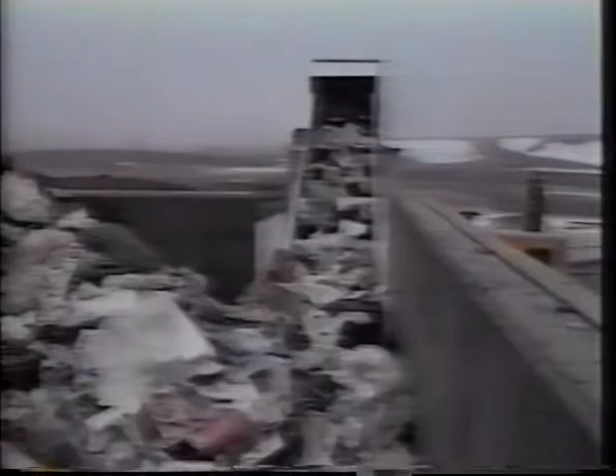What is the solution? Utilizing proven methods of waste processing to prepare the solid waste for use as a fuel for the Thermogenics gasification system. This provides substantial benefits to the waste generator, whether it's an agricultural operation using local biomass or an industry, and to local and regional government.

The benefits are: volumes that must be transported and then landfilled may be reduced by as much as 80 or 90%. Costs of transporting and landfilling wastes are reduced. Open burning and operation of unsanitary dumps is stopped. Jobs are created to process the waste, and valuable byproducts such as electrical power and liquid transportation fuels like diesel or ethanol can be produced.

A typical facility layout for municipal waste includes receiving the waste and a preliminary separation to remove the bulky and non-combustible elements. The remaining waste is then sorted on a conveyor. This removes any materials that have value for recycling, as well as any remaining non-combustible materials.

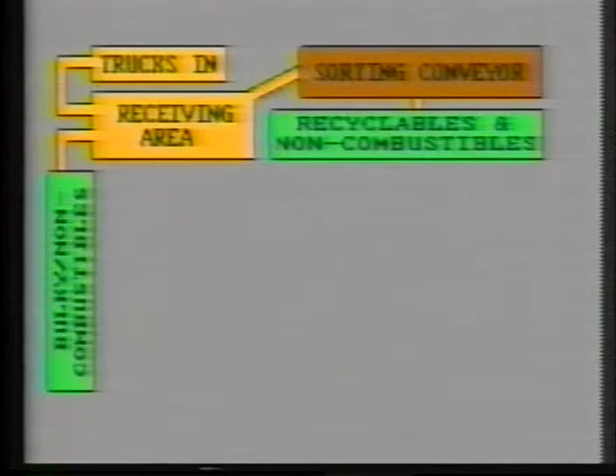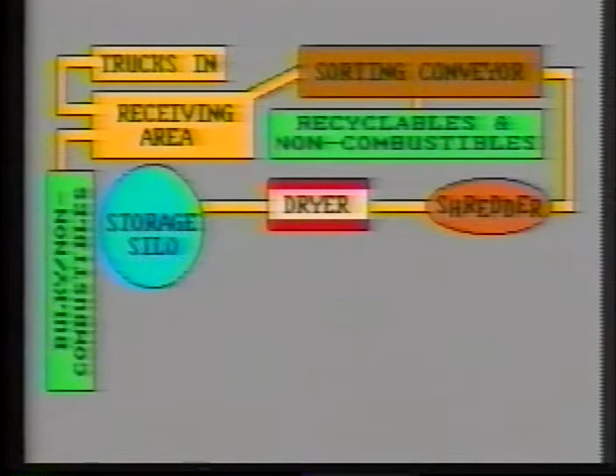The remaining organic waste is shredded and then dried. The drying process utilizes waste heat from the engines. The organic material is then stored for use as the fuel for the gasifiers. The byproducts, electrical power, liquid fuels, or heat, are used on-site or sold to outside users.

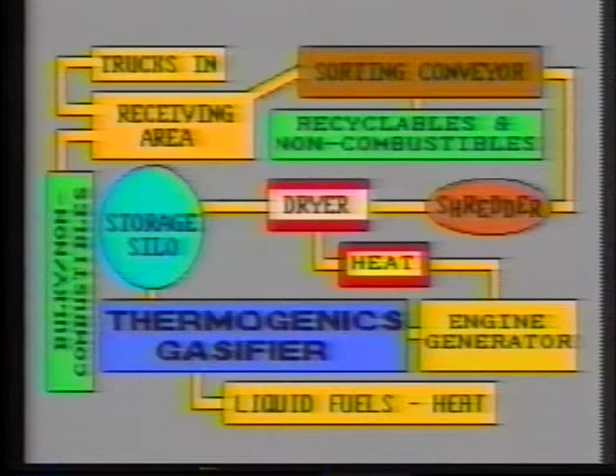If agricultural waste such as bagasse, rice husks, wood, or plant stalks are utilized, then it may only be necessary to shred and dry the waste before using it for fuel.

The organic materials, which are often as much as 80% of the incoming waste, may include materials such as food waste, biomass, paper and cardboard, plastics, shredded tires, and dewatered sludge. When shredded, and if necessary dried with waste heat from the engines, this becomes refuse-derived fuel, which is suitable for use in a Thermogenics gasification system.

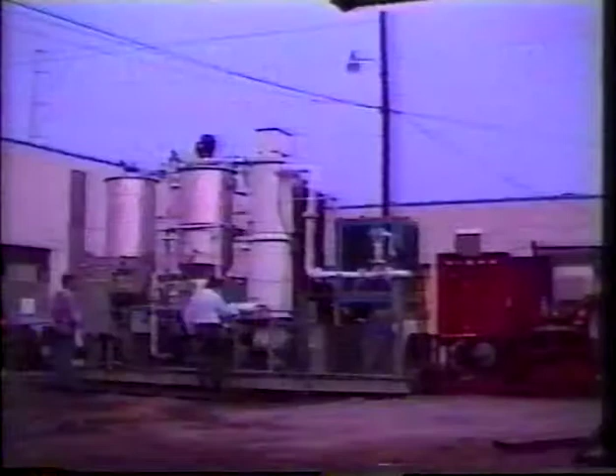This is the Model 103 Thermogenics gasifier with a capacity of 1,000 pounds, or 455 kilograms per hour, of refuse-derived fuel, or RDF, or other organic materials such as biomass, wood waste, shredded tires, or dewatered sewage sludge.

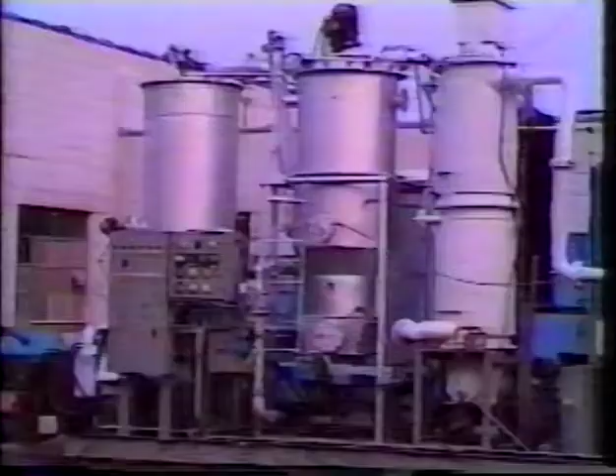This volume of RDF waste produces approximately 500 kilowatt hours of electrical power, more than enough for the entire facility. Other wastes with higher heating values can produce over 2,000 kilowatt hours of electrical power per ton of feedstock or large quantities of clean combustible gas or high volumes of liquid fuels. The gasifier does this without any emissions to the atmosphere and without the requirement of an operator.

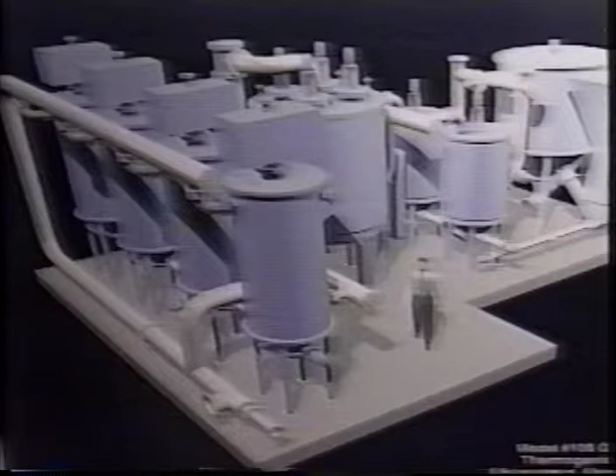More commonly, a larger system like the Model 106 shown here is utilized. Each unit is rated at 72 tons, or 65 metric tons, per day and can produce about 2,500 kilowatt hours of electrical power, or as much as 7 to 10,000 gallons per day of liquid transportation fuels from an RDF feedstock. Several gasifiers can be combined for a larger facility.

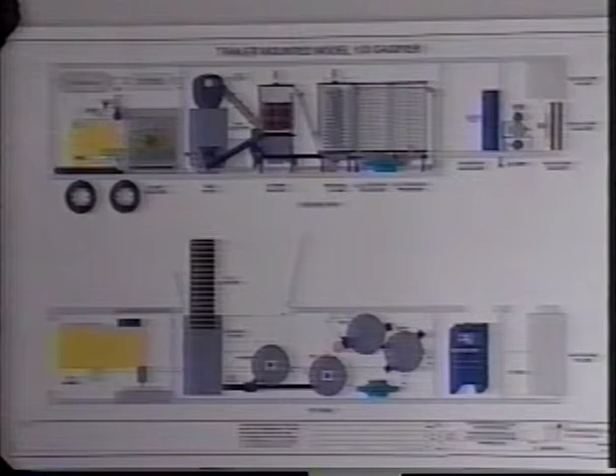Other gasifier configurations include trailer-mounted units in the 1/2 to 1 ton per hour capacity range, like the unit shown here. Other systems might provide a direct feed of gas to a boiler and thus require much less processing, and will have a cost of about half that of the full gasification system.

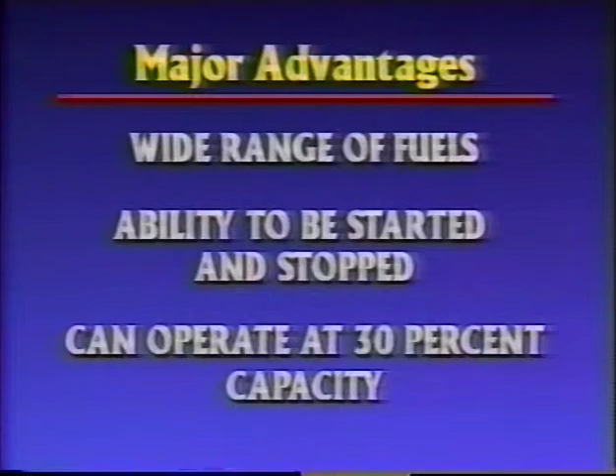A major advantage of the Thermogenics gasification system over other types of waste disposal equipment is the ability to handle a wide range of fuels, either separately or mixed, without any modifications to the equipment. A second advantage is the ability to be started and stopped and to operate at as little as 30% of capacity with no loss of gas quality.

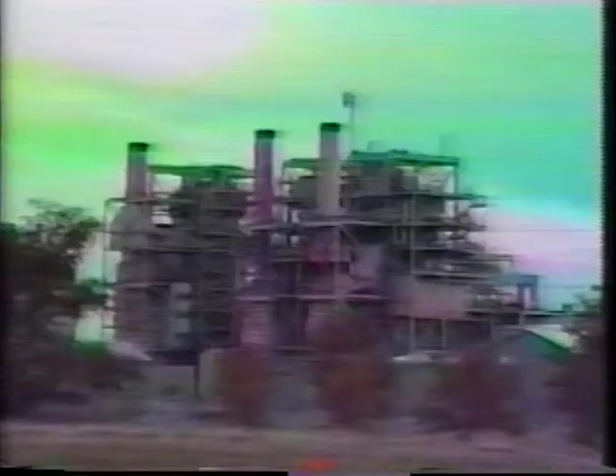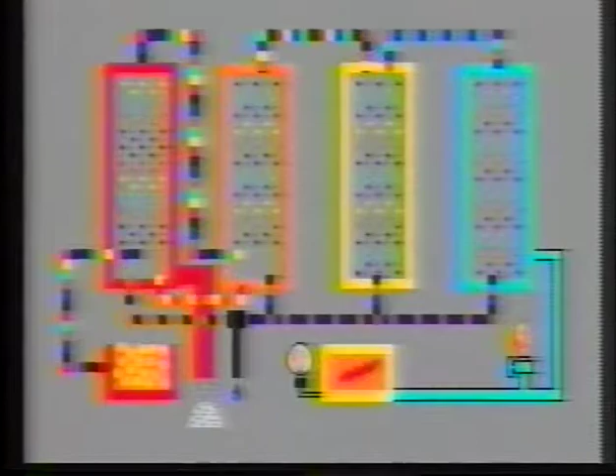During the gasification process, ash and wastewater are produced. The wastewater can be treated with equipment located on the gasifier skid and discharged. The ash, which is usually non-hazardous, can be land applied or sent to the landfill.

Like the system shown here, it is possible to use both the wastewater and ash to make building blocks, which can be used for local construction projects. This makes the entire system a zero discharge process.

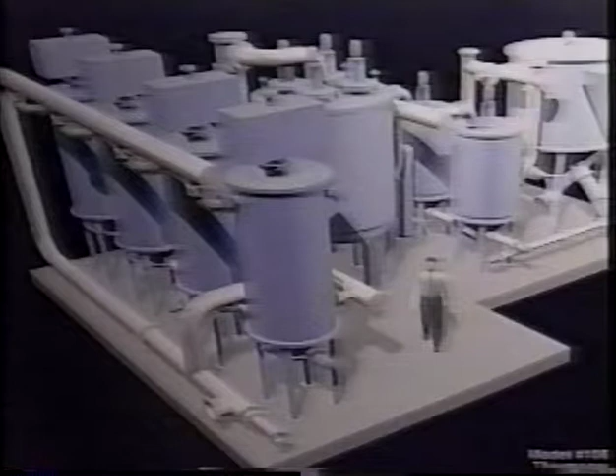As we've shown in this brief video, the Thermogenics gasification system, as part of an integrated solid waste management plan, can be an environmentally acceptable and economically viable solution to your waste management problems. We look forward to learning more about your specific needs and proposing a complete solution which will take you well into the 21st century.